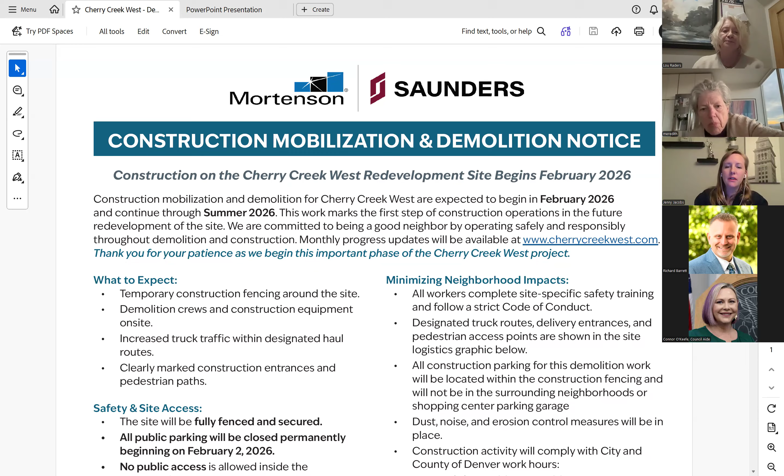Okay, so this is the one pager I was talking about, with information about hours and what to expect. And down here at the bottom, we have an aerial just showing the site and the sidewalks that will be open. We're able to keep University open, also all along First. Unfortunately, along Clayton, just on the side closest to the site, that sidewalk will be closed because that's where a lot of the utilities are, so we'll be digging up around those sidewalks.

So unfortunately we do have to close that side of the sidewalk. I know it's narrow, but there is a sidewalk on the other side of Clayton, and we also have the sidewalks on University, which are still open, and the sidewalks on Cherry Creek North Drive will be open. Also the city property where the Cherry Creek Trail is will remain open to the south of the site. So it's really just that section from the crosswalk in front of Nordstrom down to where the pedestrian crossing is to the bike path. We looked at it in a lot of different ways, but the utilities are under that sidewalk, so that was the reason for that.

Several of you have asked to get a copy of this. I will email this flyer to everyone - Jenny, this is the flyer you sent out and emailed to me, is that correct? This is it. So I will send it out to everybody on the steering committee list after the meeting, along with the recording of this meeting tonight.

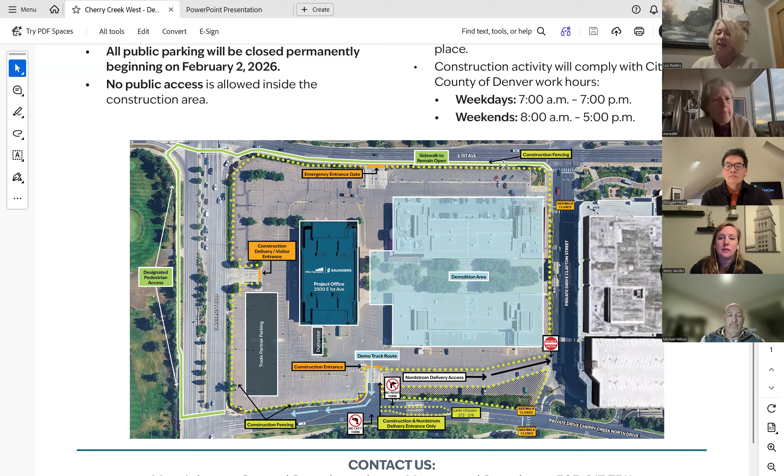Jenny, one thing that would be good, since there's been a lot of planning ongoing - it would be great if next month we could look at where you guys are in terms of your actual architectural plans and elevations, and get an update on real project specifics. I don't know if that's you or Amy who wants to do that, but sure.

I do know that, as I mentioned before, one of the big things coming up this year in 2026 is the planning with DOTI. I assume that's not finalized yet - correct - First Avenue and the intersection.

And I know, Stuart, you've been involved with that as well as our Transportation Solutions TMA representative. I don't know if you want to say anything about that process right now, Stuart.

No, I just think I'm looking forward to engaging in that. We've got some complicated factors at that intersection - we have very high traffic volumes. It's going to be very difficult to eliminate the pork chops, which I know some of you are expecting, but the volume is just too great to take those away. Those are things we'll be looking at when the project opens.

And just to add on to that - the First Avenue Speer from University to Downing, that process has been tabled. Many of you went to Bromwell to see the recommendations, and this was all part of following up from Denver Moves Cherry Creek, which is also sort of over right now - the recommendations were not funded, so they're just being put on the shelf. So there will be no changes in the foreseeable future on the Speer Boulevard bike path area between University and Downing.

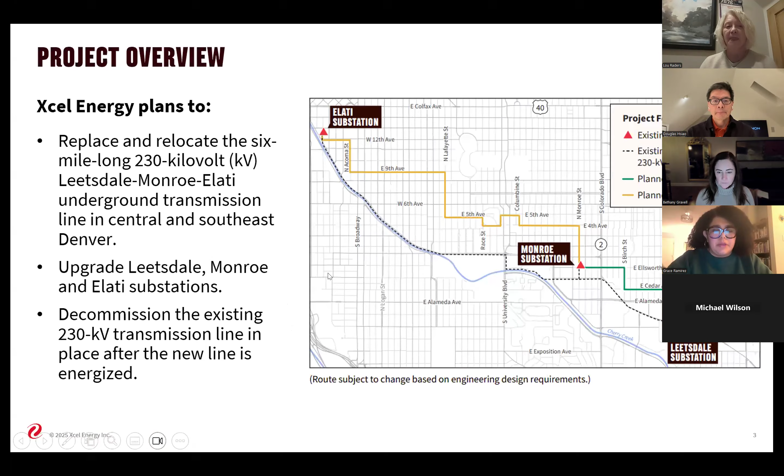But again, thank you, Lou. Thank you to Councilmember Sawyer's office for connecting me to Lou and the steering committee. I really appreciate this opportunity to come before you guys. I see some familiar names here, Doug and Robin, and of course I've worked with Bethany in the past before as well. So looking forward to sharing this.

This is kind of a long deck, so I'm going to go a little bit quickly, knowing we have about 30 minutes and I want to make sure I have enough time to answer any questions you might have. But I'm here to talk about this new transmission project. You may have heard about it back in October and November.

We sent out letters in snail mail to everyone back in October, announcing the project and sharing our project website, which I believe Lou has shared with you all via email as well. We started outreach for it, including some virtual town halls, which some of you may have joined us for. We had one virtual town hall and two in-person town halls about this project back in November. But we're going to continue community engagement.

So this is where I'm so pleased to be able to get in front of all of you tonight. We'll go through this quickly, but please know that I am happy to come and attend any of your registered neighborhood organization membership meetings to do this presentation with your individual neighborhoods, or any other stakeholders you would like me to present to about this project.

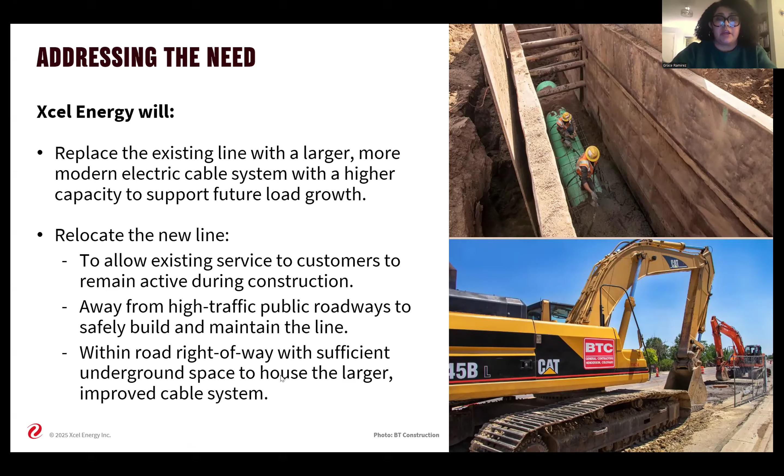This keeps skipping on me, apologies.

So some of the project benefits we already talked about: enhancing our reliability, strengthening the electric grid, and supporting renewable energy generation imports into Denver.

This little schematic shows how electric power starts and how it moves eventually to us as customers. It starts at a generating station that could be wind or solar, or at a generation plant. It's stepped up to a transformer level voltage and carried along that larger, taller transmission line - those really tall poles you see with multiple arms, like over I-25 and down some of our transmission easements through central Denver. That voltage is carried through a transmission line, then it's stepped down and carried again through our transmission lines to a substation.

And this is where this project takes place essentially - here, where we underground that transmission line coming out of a substation to connect back into another substation, which is what we're doing with this project, connecting three different substations with an underground transmission line. Then it gets stepped down to a transformer from that distribution substation and distributed along this distribution line at a lower voltage to our customers, whether they're industrial, residential, or retail customers.

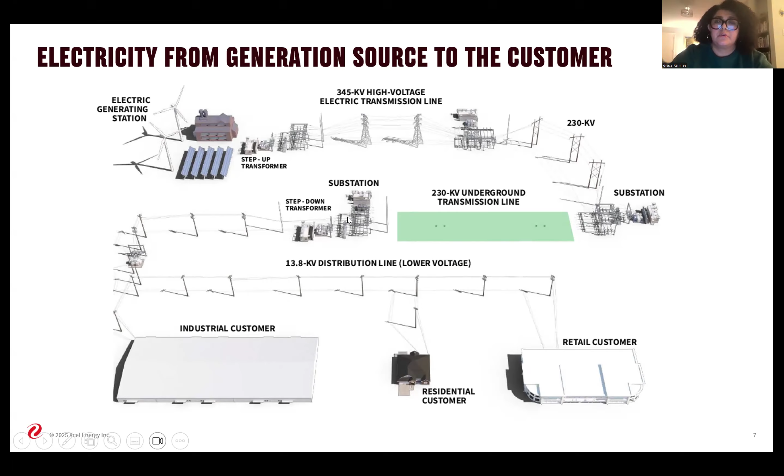Grace? Yes, go ahead, good question. This is Bob Fuller. On your very first slide, you said you were replacing and decommissioning a 230 kV line.

Yes, and replacing it with a 230 kV line. That's clearly not the case - you're increasing it. What will the increased capacity of this system be?

Ruby, are you there? Can you help me answer this question? Because my understanding is - let me go ahead. So the capacity is still going to be 230 kV, from what's under Speer to what we're doing now. It's just a more modern system that can accommodate more growth in the future. And what will that future - I mean, what is the ultimate capacity of the system you're putting in?

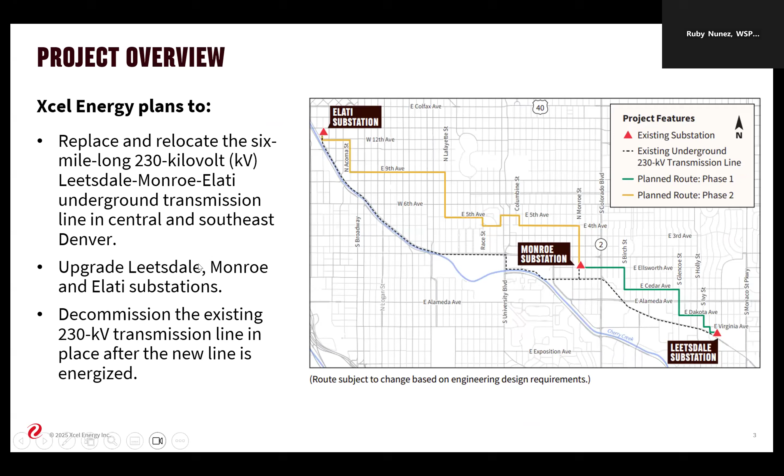See, we'd have to double check with the engineers on that one. I can tell you 500 kV, or will it be 270 kV, or what's the ultimate capacity it designs for?

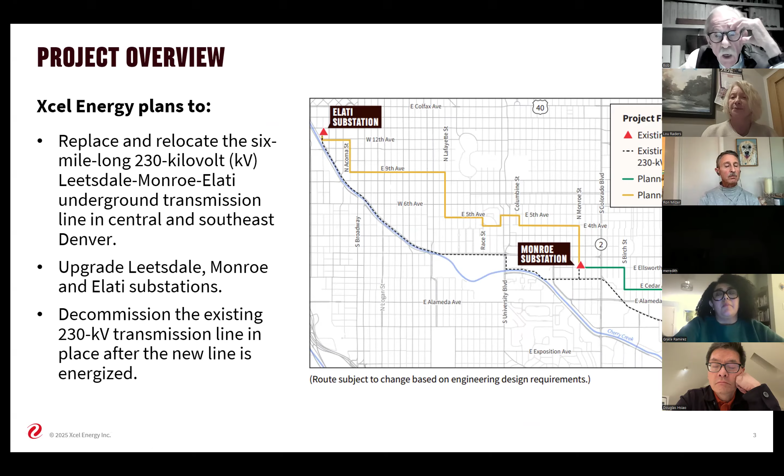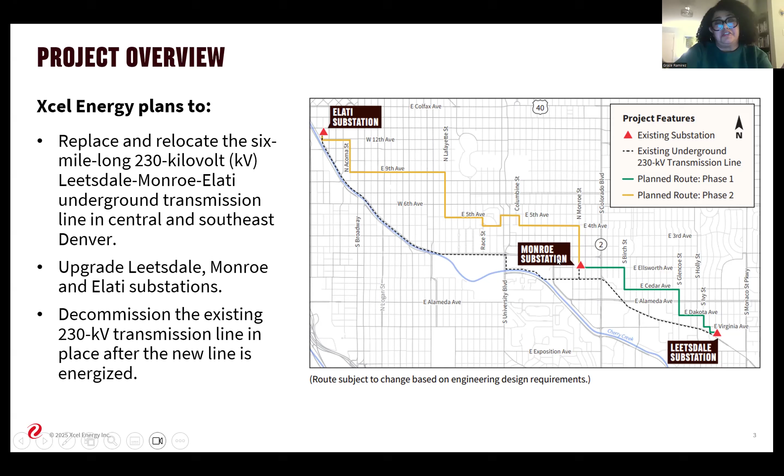I can follow up with you on that answer. I can tell you that some of the work happening at the substations includes additional transformers to allow for more capacity along the line. I think that has something to do with it, but I'm happy to respond back. Unfortunately, I don't have the engineers on this call, so I'm just trying to cover, it's a pretty basic question is all, and there was a lot of blowback with the first line, which I was involved in.

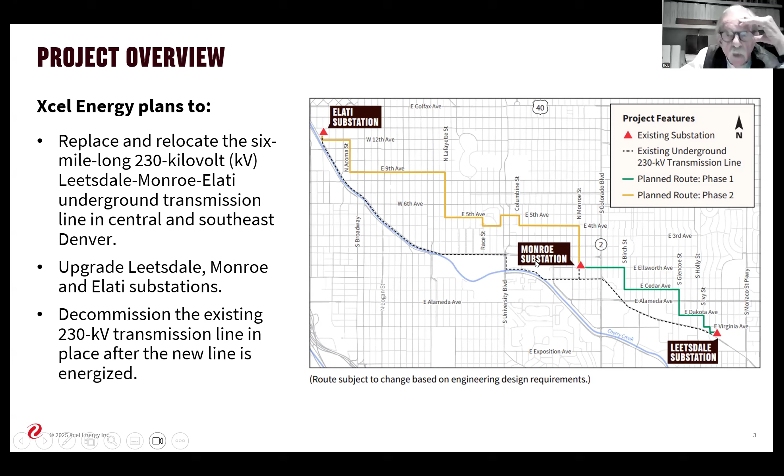Oh, were you, sir? Down Speer Boulevard. Oh wow, those are heavy duty transmission corridors. They are. To put them through residential neighborhoods, that's why it's in Speer presently, so that it would not be adjacent to homes. I'm just curious, I know traffic-wise it's a problem, but those are heavy duty, ultimate capacity corridors you're sticking in. I'll shut up now and let you get on with your presentation, but that information would be very helpful.

I appreciate the question, Bob, and we'll definitely follow back up with you all. Ruby's helping me take notes. We didn't introduce Ruby properly, but she is with our consultant team who's helping us stand up all the different engagement and communication tactics we're using for this project. So she's taking notes, and we'll make sure to respond back to your question about the kV line.

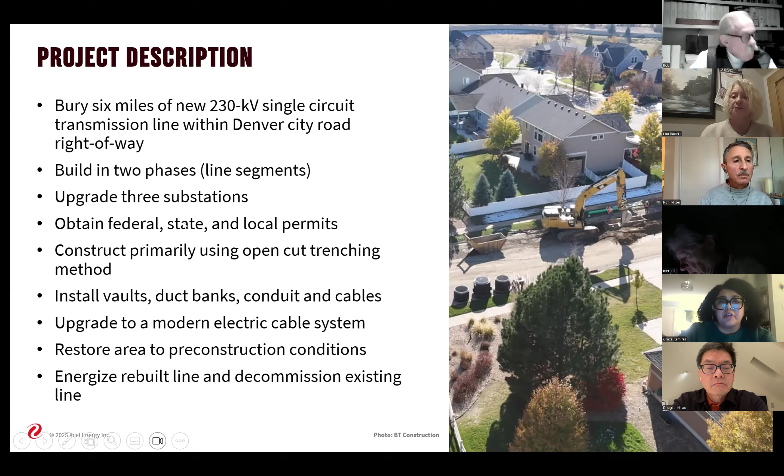Thank you there, Joyce. There is a little bit more information about why we're choosing this route on a further slide, to your earlier comment as well, Bob, as far as why we're choosing residential streets. Going back to this then, again, we're going to be upgrading the three substations. There's a lot of different permits that we're working through, both at the local, state, and federal level, since we're crossing Colorado Boulevard, and the various jurisdictions that we're working through with this route.

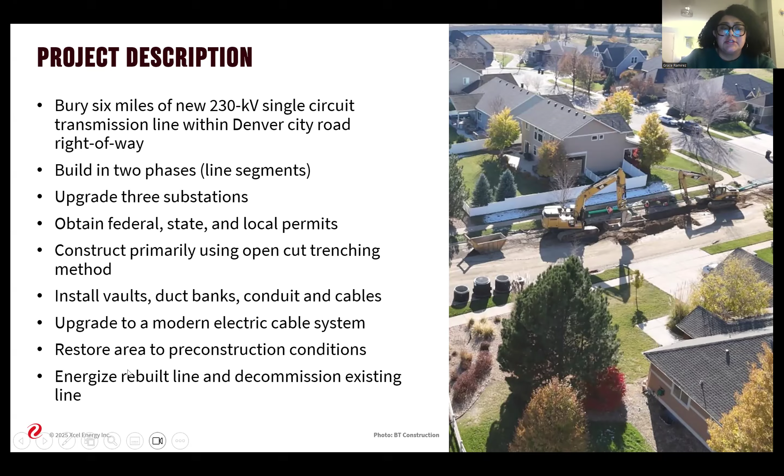Because it is, construction is an open cut trenching method, which is what is shown here in this picture as well. We're going to be installing vaults, duct banks, conduit, and cables. Again, back to Ruby's answer, it's really just upgrading into a modern electric cable system that's going to allow us to bring in renewable energy. We'll then be coming back and restoring the area to the pre-construction conditions, energizing that new rebuilt line, and decommissioning the existing one.

This is a little bit more information about the route, a little bit clearer, again we are currently in the Hilltop neighborhood, so we're at the beginning of phase 1. When we cross Colorado Boulevard and come to the Monroe substation, we'll be in phase 2. We are planning another virtual town hall when we start phase 2.

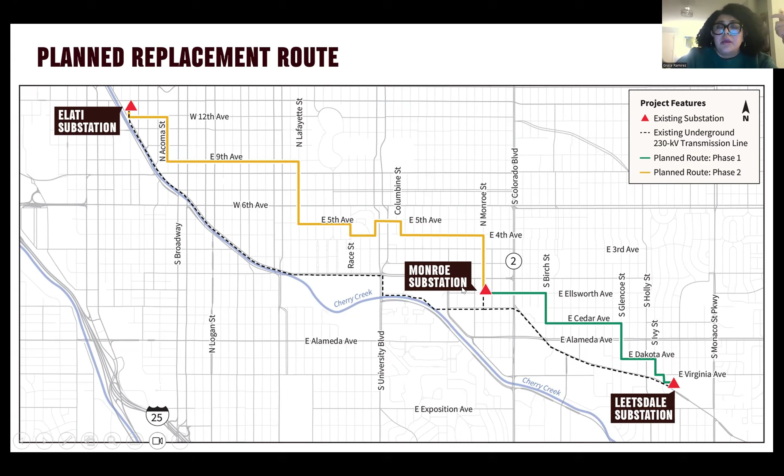For those of you and your members who were not able to join us for our first series of open houses in November, we will be offering a virtual open house before we kick off the second phase. I'll be back in contact with the council woman's office to provide that information, so you all are aware of that night. We don't have a date identified yet, but it will be later this year for that virtual town hall. But again, the route is on mainly residential streets.

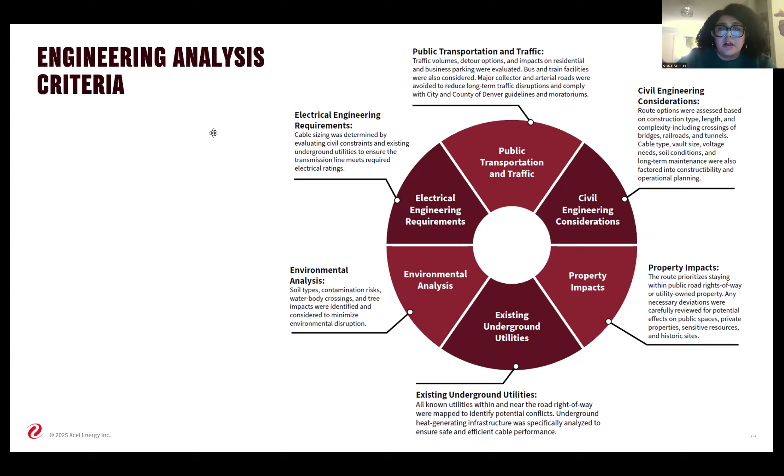This is some of the engineering analysis that we went through in order to choose this route. I know I keep moving this thing to try to see if you guys can read this, but I'm happy to share this PowerPoint with Lou, and she can send it out to everyone so you can read through it at your leisure. But there was a lot of considerations we had to take in.

I'm sorry. Did I cut someone off? Does someone have a question? No, I think maybe I'm dog managing. So sorry about that. Oh, okay. No worries, no worries, friend.

Again, I'll send this PowerPoint to Lou so you guys can read it at your leisure. But there's a lot of existing underground utilities in a lot of the different streets that we analyzed, the environmental analysis of where we can put this type of equipment, the electrical engineering requirements where it has to be as much as possible in a straight line, the impact of public transportation and traffic. We had meetings with DOTI multiple times; DOTI strongly suggested we stay off streets with bike lanes and off arterial streets, among all the different considerations we took in when analyzing this route.

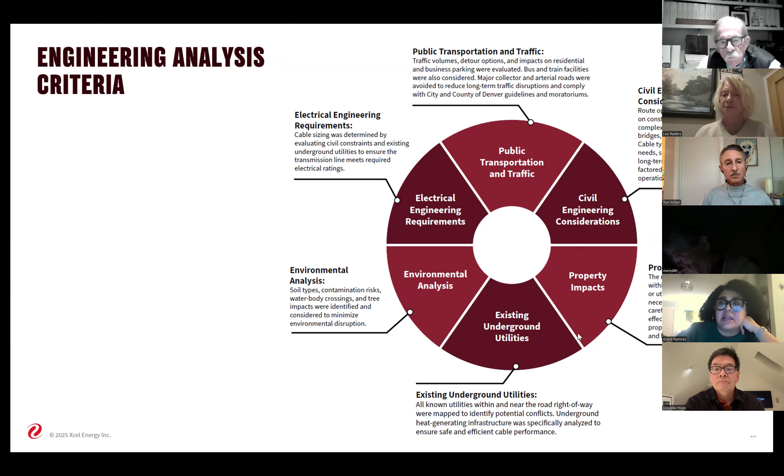Obviously we understand there's property impacts to your properties, but also property impacts to the right of way, and even just space being a really big one as far as existing underground utilities, taking into consideration all these other things, these other criteria.

I've been talking about this quite a bit, but again, some of the constraints with the routing are staying off high traffic arterial roads, the existing underground facilities, above ground wastewater infrastructure we had to avoid, and staying off streets with dedicated bike lanes and one-way streets, which is difficult with 6th and 8th being the other corridor through central Denver.

All the different permitting requirements across city park spaces, trying to stay off streets with parkways, work area vicinity to schools. And I do recognize that we are coming very close to Bromwell, and there are construction impacts on businesses.

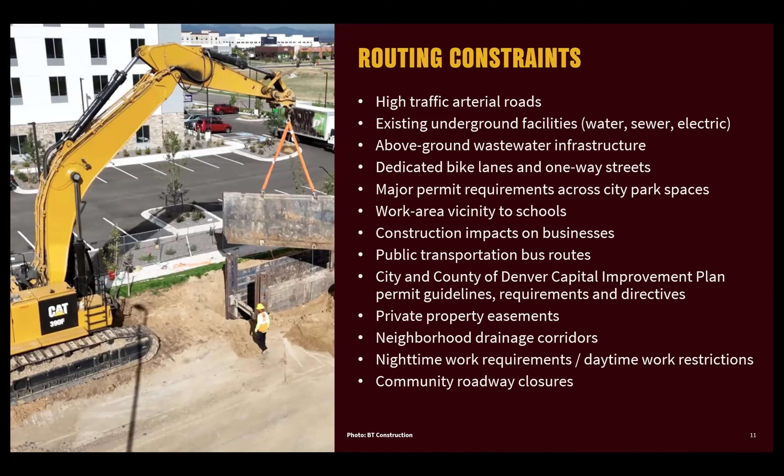We had at one point looked at going down 3rd Avenue through Cherry Creek. From an engineering standpoint, the engineers loved it. I told them, over my dead body, are we going down a small business corridor in the Cherry Creek Business Improvement District? The impact would be, I'm not saying necessarily greater, because I recognize this as a huge impact to our residential customers along the route, but impacting people's small businesses along 3rd would have been definitely not the route we as a company would want to go.

So a lot of considerations in looking at this route. Again, public transportation, bus routes, thinking through all the different city and county of Denver improvement plan guidelines, trying to avoid private property easements and stay in the right of way as much as possible, the drainage corridors. I'm thinking about how quickly we can do this work, whether we're able to do it at night, if not, daytime work restrictions, knowing what other construction is happening throughout the day, and what traffic management needs to look like, working with DOTI closely. And then, how do we lessen the impact as much as possible? This is how we determined this route.

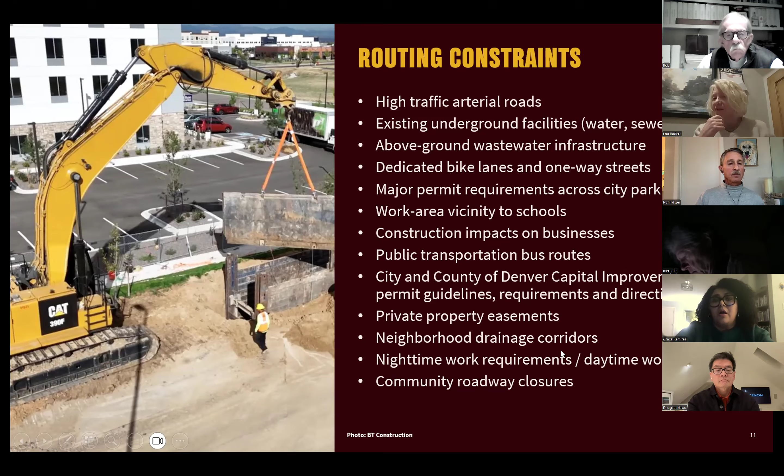Permitting - I won't read through these, but we have to go through a lot of permitting. This is just the city and county of Denver permitting that we'll be doing for this project, which we're already doing since we're already working in Hilltop.

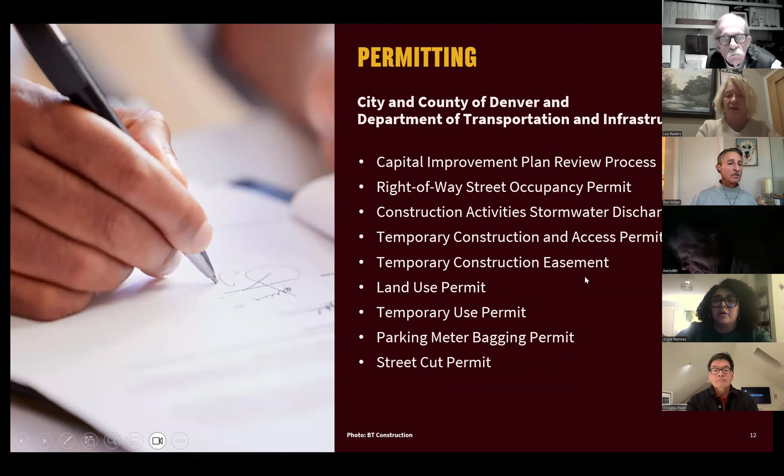This is our anticipated project schedule. We were planning this for a couple of years. We started the permitting conversations in 2025 with both the city and the state. Our public outreach began in Q4 of 2025 and will continue throughout the project.

Our pre-construction was really in Q4 of 2025, where we were doing some work within our Leetsdale substation and a little bit of work in the right of way in South Hilltop neighborhood, but continuing that pre-construction work through this year. We officially kicked off construction for phase one again in Q4 of 2025.

We anticipate phase one going until 2027, and then phase two really starting in 2026 and continuing through 2028. That's why I anticipate our next round of virtual open houses before phase two to be sometime later this year, with an in-service date for the new transmission line in 2028.

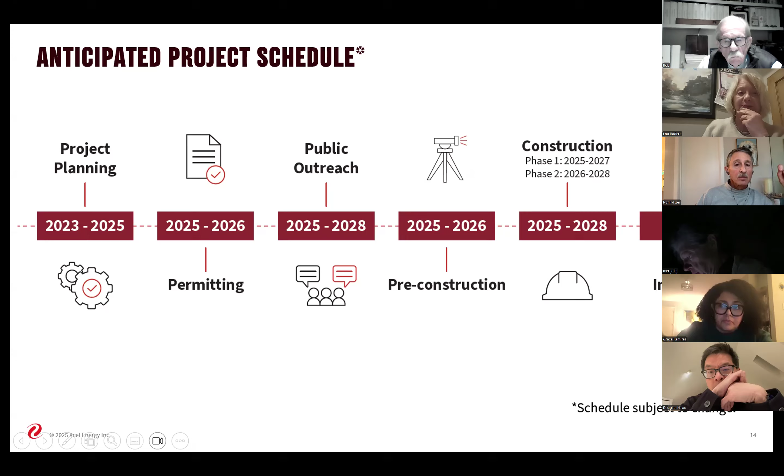One of the good things about this project - I recognize it's a lot of benefits to having greater electric reliability throughout central Denver, but one of the additional benefits is that we'll have funding to do some beautification work at all of our substations. I know Robin and Cherry Creek East have some ideas about what we can do at the Monroe substation. We've had a lot of folks stealing things from our irrigation system at Monroe.

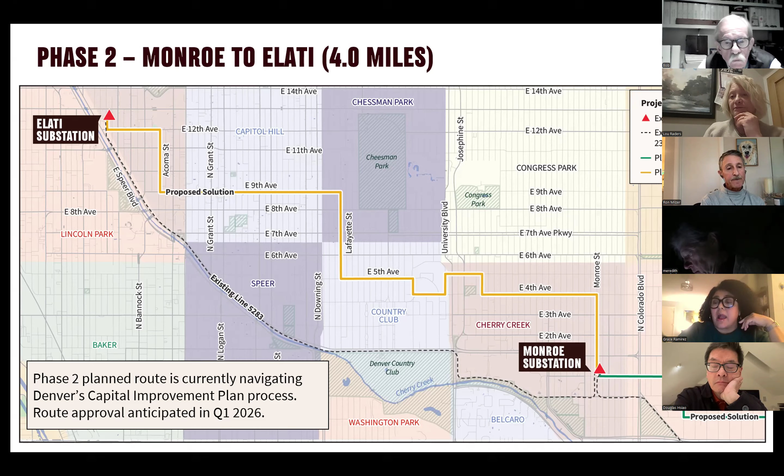A few months back, we ended up pulling out all of the dying grass and putting in rocks. So obviously rocks deter urban camping and our unhoused community from moving in, but it does not look as pretty as a nice landscaped corner. So we're very cognizant of what beautification projects we can do as part of this project. But this is again a closer look at that route we're looking at, which has been, for the most part, approved by DOTI.

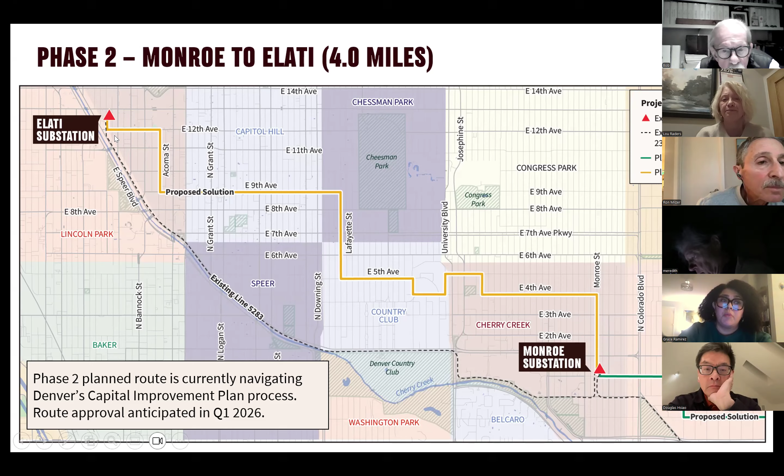The only piece we're still working on is this last bit in the Golden Triangle, because of the city's proposed 5280 trail coming down Acoma. I don't know the timeline for that, but we're still working with the city to finalize this last little bit of route. Otherwise, this is our final route, approved by the city.

Our construction process, I already talked about this a little, but this is a good schematic. We'll come in and do the pave cutting, remove the pavement, and excavate the trench. It's a multiple step process. When we're done installing the new electric cable system, we'll do temporary pavement, then come back with permanent restoration. I'm trying to make the timeline between temporary and permanent restoration as quick as possible, so you're not living with this temporary look and feel on your roadway in front of your home.

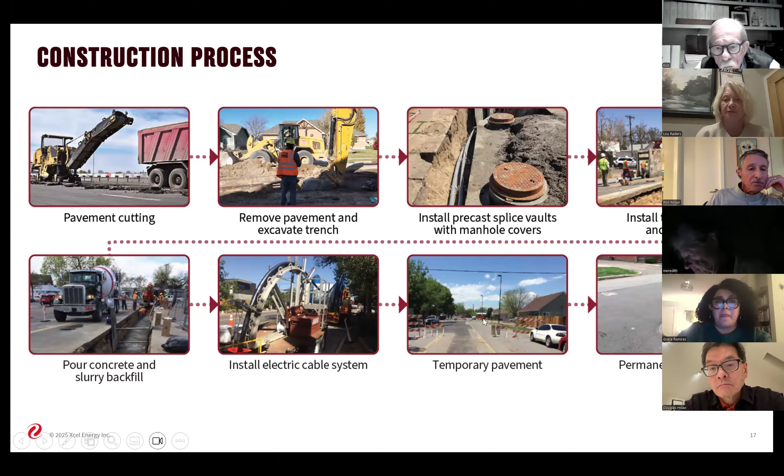What to expect during construction: this is heavy equipment coming into your residential neighborhoods, so we'll be doing a lot of marking on the streets as we plan out the next phase of work. Pruning and trimming some vegetation is needed to make sure the work continues safely, and we're partnering with the city's forestry department to make sure we're not harming any trees in the right of way as we do this work.

There will be street and sidewalk closures, a lot of detours and signs, and potentially increased travel time for commuters going north and south.

There will be some temporary parking restrictions, and we're very cognizant of that as we go into Capitol Hill, with a lot of apartment and condo buildings. We need a higher level of engagement and communication with that neighborhood, which relies more on street parking, so we're working closely with property owners to ensure their tenants are aware of these restrictions, as well as temporary changes to street and driveway access.

We have a great crew that's happy to work with you individually to ensure you have access to your garage. In Hilltop, we've worked with customers who needed access to their EV charger in the garage, so we're cognizant of those things and happy to work with you and your neighborhood. We understand trash pickup and everything else that comes into play when we're cutting a trench through the middle of the right of way, and there will be fencing around the work to keep everyone safe.

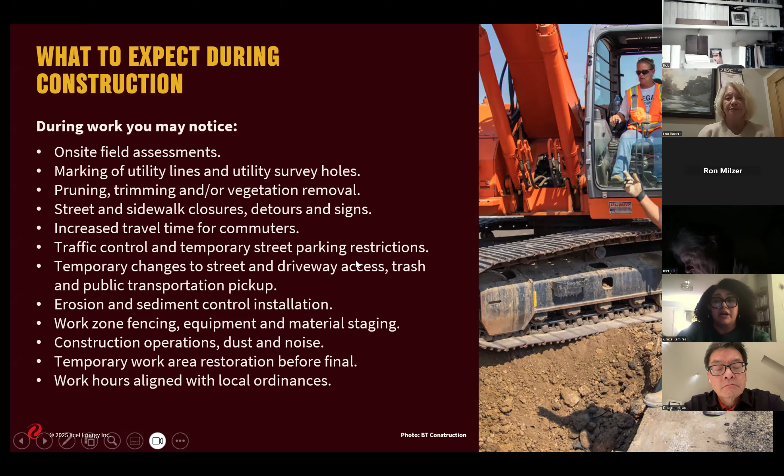For traffic control, we're working with DOTI to ensure we have enough signage. We'll be putting up yard signs along the right of way with a QR code sending people to our project website, so that anyone walking their dog or stopped at a light who might not be aware of this project can scan the code to get informed, even if they're just driving through the neighborhood. There's also a URL for our project website, and I have the QR code I'll be sharing.

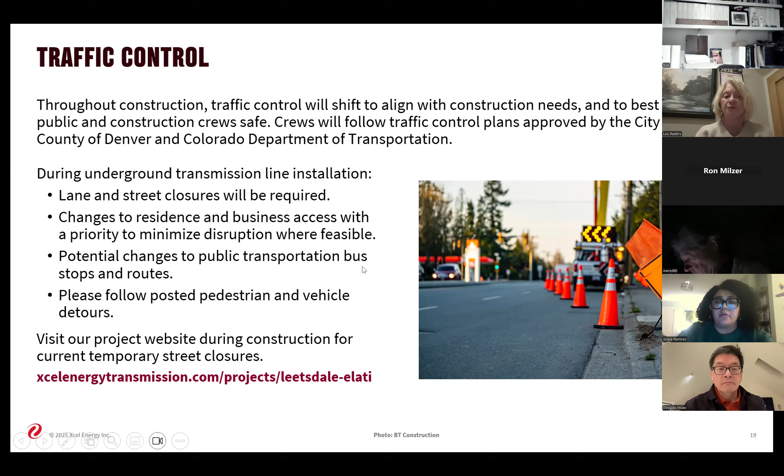We already talked a little about this. Project safety is, obviously, first and foremost our biggest priority, ensuring this is safe for your neighborhoods, for you, for your neighbors, and also for our crews. So here are some tips for what to think about during construction.

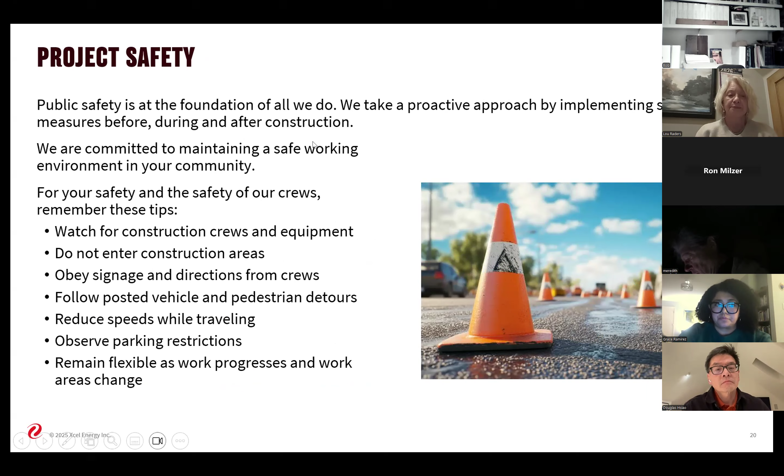The public outreach and engagement really kicked off in October when we sent out the mailer and announced our open houses. I also did briefings with all of our elected officials who are affected by the project—Councilmember Hinds, Councilwoman Sawyer, as well as our at-large council members—and we'll continue that. We mailed notice letters to the registered neighborhoods, business improvement districts, and GIDs along this route, and we're continuing that engagement by monitoring our project dedicated phone line.

We have a project website with an interactive map and a lot of information, as well as an opportunity to sign up for our newsletter. There are construction notices and periodic project update letters we'll be sending, but you can always sign up for that newsletter too.

I already mentioned the placement of construction signage and door hangers as we're moving the project down the route. It's about two weeks on every two blocks we're spending. I can talk more about that, but I know I'm out of time, so I'm trying to go quickly.

Meeting with property owners on site so we can work through any access issues, and those e-newsletters during construction if you sign up on our website. So, opportunities to engage with us, please scan and check out our website. Sign up for our construction newsletter so you're aware of any detours, or as we inch closer to your neighborhood, you're up to speed on where we are with construction. We have a dedicated email, which Ruby helps us answer, and our dedicated project phone number. We work with Power Engineers to ensure good coverage of all these forms of communication, so you have prompt responses to your questions throughout the project.